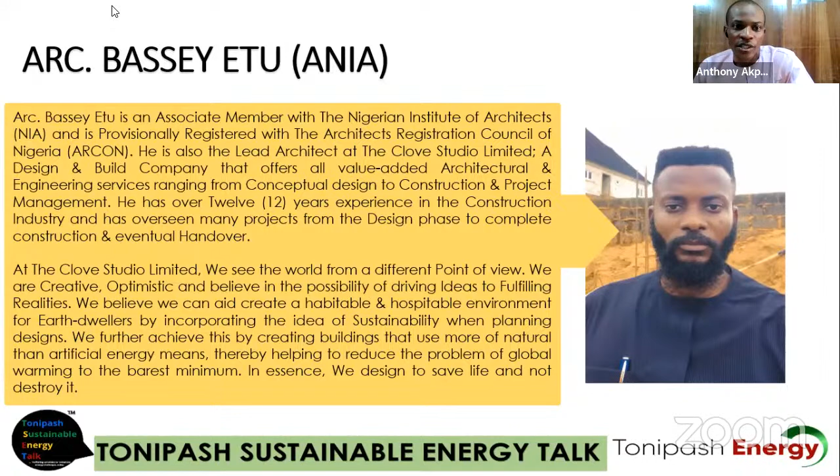So we will go straight to our first presenter, who is right now on the call, Dr. MKO Balogun. He's the founder of the African Facilities Management Institute and the GMD/CEO of Global Properties and Facilities. He was a co-founder of Dome FM Limited, which later merged with WSP FMC Nigeria in 2012, for which he became the MD. MKO has grown his company from a local Nigerian company to a Pan-African group, registered and operating in 10 African countries. He had his Bachelor in Mechanical Engineering from the Federal University of Technology, Owerri.

He has an MBA from Lagos Business School of Pan-Atlantic University and a PhD in Management from Commonwealth University, Belize. His area of focus in recent time is sustainable urban design and development and facility management. He was recently elected to the prestigious fellowship cadre of the Nigerian Society of Engineers. He's also a professional member of the Green Building Council of Nigeria and the national chairman, Nigerian Institute of Facility Engineering and Management.

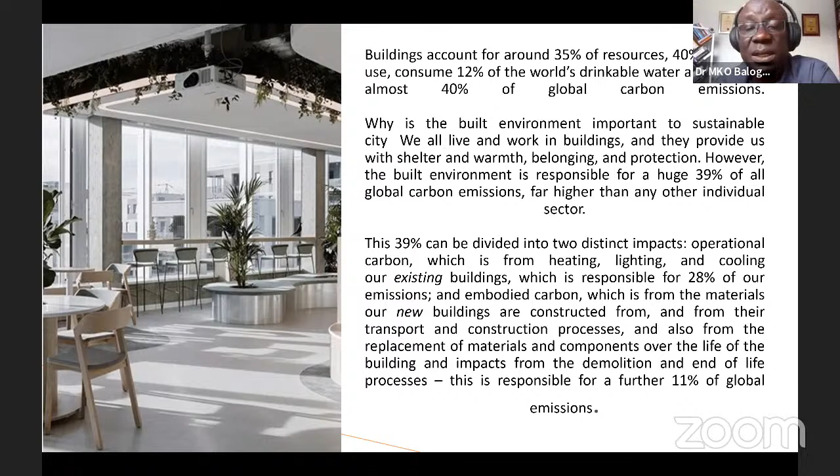Operational carbon, which is from heating, lighting, and cooling existing buildings, is responsible for 28% of our emissions. Embodied carbon, I'm sure some of our panelists are going to talk about the embodied carbon of materials in buildings, accounts for 11% of global emissions. So this is very important, the need for us to pay attention to building and the real estate sector.

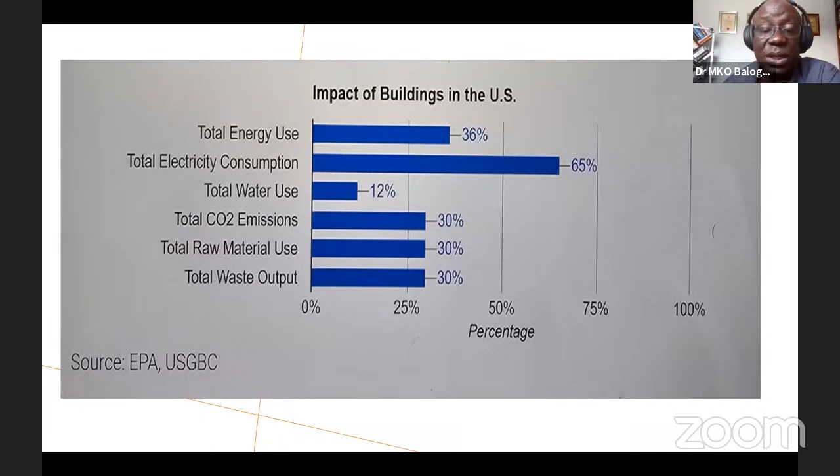This is the data from the US provided by USGBC. Energy use is 36%, total electricity consumption is 65%, total water use is 12%, CO2 emissions 30%, total raw material use is 30%, total waste output is 30%. So you can see the impact of buildings in the US. We don't have data for Nigeria and Africa yet. I'm sure any of our panelists may have that information to share with us, but this shows the need, and thanks to the organizers of this session for us to talk on it.

We cannot talk about sustainable buildings without the cities, because they exist in cities. All the things that come into building design, development, and management come from cities. The level of awareness, materials, and development in a city matters even for organizations interested in building sustainable buildings; they may find it difficult if the city where they operate doesn't provide that opportunity. So sustainable design is a method of wisely using resources to create high quality, healthier, and more energy efficient homes and commercial buildings. A building is more than the sum of its parts; its process and impacts matter too.

The main objectives of sustainable buildings are to reduce or completely avoid depletion of critical resources like energy, water, land, and raw materials; prevent environmental degradation caused by facilities and infrastructure throughout their life cycle; and create built environments that are livable, comfortable, safe, and productive. This is very important, and everything we're talking about here emanates from the environment, from where the buildings are situated.

According to the whole building design guide, there are 6 key fundamental principles for sustainable building design that need to be focused on. The first is to optimize site potential. In everything we're doing, you find that building orientation is very critical.

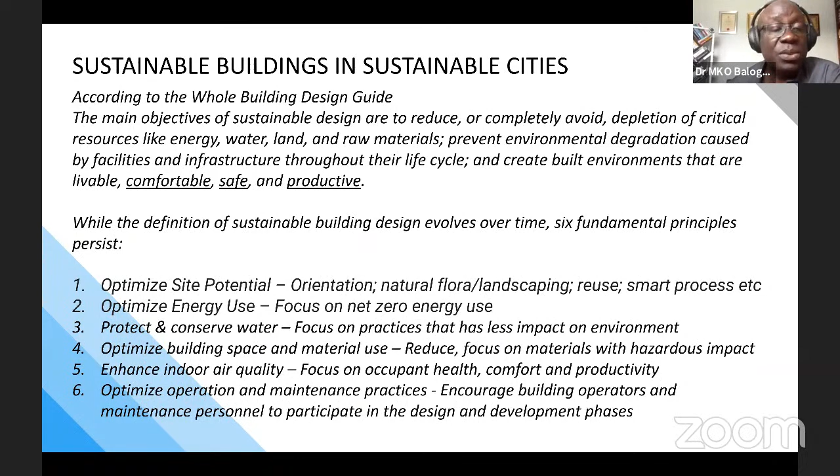As I mentioned, there's this need to connect cities and the buildings. I'll just take you through a couple of concepts on sustainable cities. Sustainable cities, also referred to as eco-cities, work towards creating environmentally, economically, and socially resilient surroundings for their citizens without compromising the needs of future generations to thrive in the same environment. According to the Sustainable Cities Index, a sustainable city can be evaluated on 3 parameters: profit, people, and planet. The profit factor measures the value of real estate and the ease of starting and running businesses. The people index focuses on the living standard of the people, literacy, education, and health.

We talked about indoor air quality as part of the consideration. Profit is part of design. Today actually in the industry, there are companies who are looking for sustainable buildings to buy, to lease, or to invest in. So it's become a major driver of profitability for investment.

Planet: our social responsibility to ensure we don't deplete the environment or impact negatively on the environment is also very critical. Transportation, water, sanitation, air pollution, and carbon emission, among other factors, are critical components and elements that drive sustainable cities, which, as I said, link to the buildings. Cities do not exist without buildings, and buildings do not exist without cities.

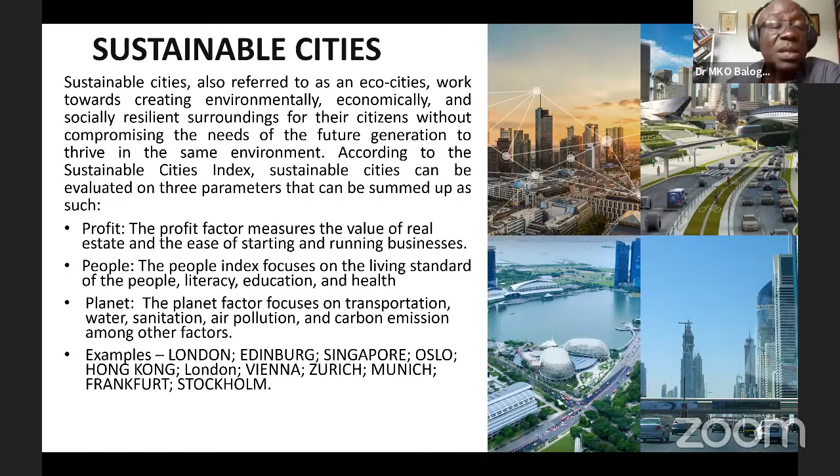There are a couple of cities in the world today that are focused heavily on sustainability and also enhancing sustainable building design. You have London, Edinburgh, Singapore, Oslo, Hong Kong, Vienna, Zurich, Munich, Frankfurt, and Stockholm. They're all focused on sustainable development, and you find that most of the buildings today that are focused on sustainable development exist in those cities.

These are just resource utilization. You see waste generation has been mentioned. Waste generation is growing. Buildings contribute a lot, as you can see from the previous slides. It is believed that we're going to be generating 2.2 billion tons in 2025 globally. Carbon emission is driving towards 70%. Buildings contribute more than 39% of that globally.

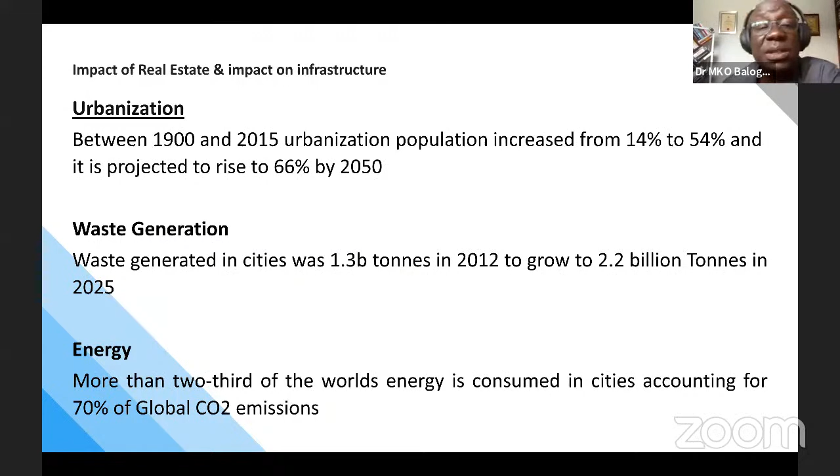So, what are the industry players thinking or saying about the impact of buildings on the environment, and what actions are they taking? Now this is very important, and this also becomes positive for those of us in the industry, because we have people in our space who are interested, not just at the industry level, but also at the global level.

It's already a group being set up by the World Economic Forum to drive the framework of sustainability in the real estate sector. The idea is to ensure that people who are in the industry, who are investing or managing or operating buildings, start focusing on how to achieve net zero and reduce impact on the building. Recently, 8 companies signed a declaration to reduce emissions by 50% by 2030. Those companies include our company, GPFI, as one of the companies driving this globally.

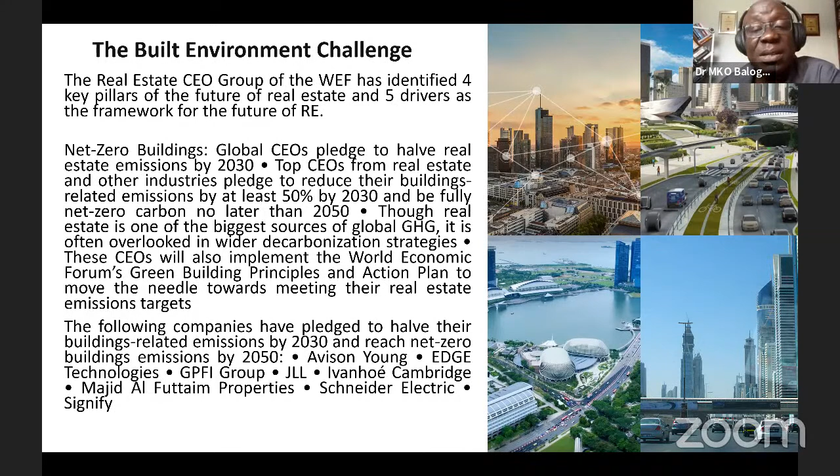And basically, it's driven from ESG. Today, companies are focused on environmental, social, and governance, and so sustainability has become a component of that. I mentioned employee expectations, societal demand, the business goal of environmentally friendly, economic green building. Occupiers will pay more for green buildings than normal buildings. The global need to reduce emissions is the major driver of increased focus on sustainability by the real estate sector. Greening existing buildings has also become very important, and most companies today are focused on ensuring that happens.

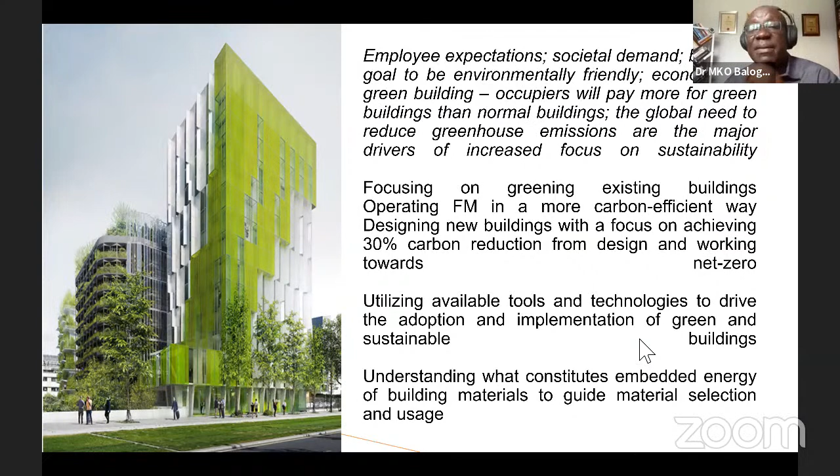Every major organization is moving towards rethinking and remodeling their assets. Fortune 50 companies alone occupy 2.6 billion square feet of real estate, and some of it is mostly empty because of the pandemic, but everybody's redesigning. And the purpose is that more buildings will be taken if they are green buildings than if they are just ordinary buildings.

There are five topics that the real estate industry is focusing on and advancing. The net zero agenda is critical. Navigating the reporting and measurements landscape to ensure that we're not just focused on net zero, but we're reporting progress at every stage and every year, so that people can see we're making progress. Confronting climate risk, which is very important in design, development, management, operations and maintenance of our buildings. Prioritizing existing buildings, finding ways to remodel them to make them more sustainable.

Focusing on building materials, which is a major component of achieving sustainability. I said some of our panelists are going to expand more on that. These are: reduce embodied carbon, increase energy efficiency, increase renewable energy supply on site, maximize off-site renewable energy procurement, offset remaining carbon. So these are things that are today being driven by the people in real estate, which, as I said, is good news that we're focusing on achieving this.

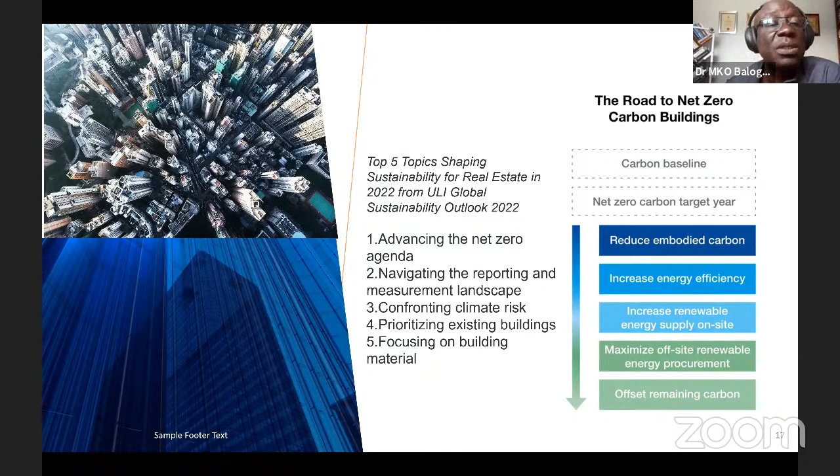So what are the things being done? Understanding your current sustainability adoption level. Where are you today? What have you done? What do you need to do? Develop capacity, understanding the opportunities for greening and transforming your spaces. Working with experts, understanding what can be done, what the options and opportunities are for greening existing buildings and transforming your spaces. Creating a carbon emission target and driving towards achieving it. I've mentioned global companies are focusing on setting targets and driving towards achieving them, looking at various options to do that.

Creating business-wide interest and adoption. This is very important because in most organizations, the top management may be focused on sustainability and green building, while members of the organization are not aware of what's going on. So this is part of the drive to do it, company-wide adoption, and the same thing countrywide, citywide, to ensure that we start driving adoption and interest in sustainability.

Collaborate with others in your building and community for the adoption of these methods. Very important. Working with individuals, working with organizations, working with private interests, we ensure that this is achieved. Promote your sustainable practices in the community. Advocating and showing what you're doing is part of creating awareness. When people know that others are doing it, it helps them to say, yeah, it's possible, and we can also do it.

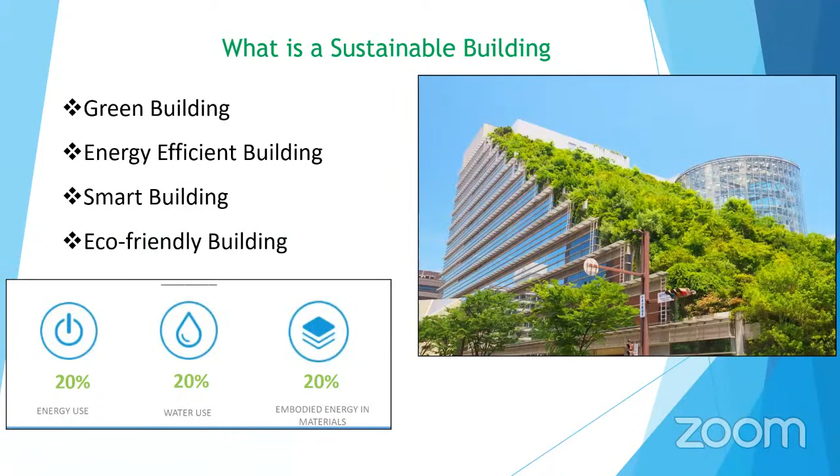Now, why the concept of green building? Why is it relevant? Why is it out there? If we look at the 17 SDG goals by the UN, about 9 of them are supported by green building. If we look at good health and well-being, sustainable building or green building can promote good health and well-being. Research has shown that people living in sustainable buildings live a healthier life than those living in conventional buildings. Green building also supports goal number 8, which is decent work and economic growth. When you are healthy, your productivity will also increase.

That's SDG Goal 8. If we look at SDG Goal 11, sustainable cities, green building also promotes sustainable cities and communities. That is why in Germany they have what they call the green urban city, where you don't only certify a green building, you can also certify a community or a big estate. Let's say Banana Island or an urban city, you can also certify them as sustainable. Most importantly, when we look at Goal 13, which is climate action, green building has helped to reduce the effect of greenhouse gas emissions, which is causing a lot of problems in Africa. We'll talk more about that later.

Also, when we look at Goal 17, which is global partnership, that is what sustainable building is currently doing. There are a lot of green building certification bodies creating partnerships worldwide, and IFC is driving that partnership seriously in Africa. When we look at goal 7, which is affordable and renewable energy, for a building to even achieve net zero carbon, that building must have used renewable energy in the form of solar. So green building also helps to promote innovation and create resilience to climate change in our environment.

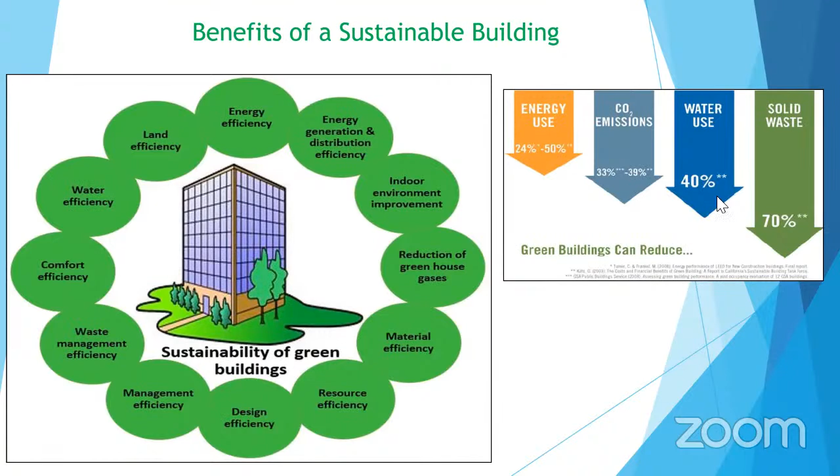Now, sustainable building design in Africa. Why Africa? Why are we so particular about Africa? Because that is the title of the presentation, Sustainable Building Design in Africa. Why are we so particular about Africa? One, because of poverty. Poverty can create an environment that is not sustainable. Poverty is rampant in Africa. Two, there is a high population increase. Despite the poverty level, the population is increasing exponentially.

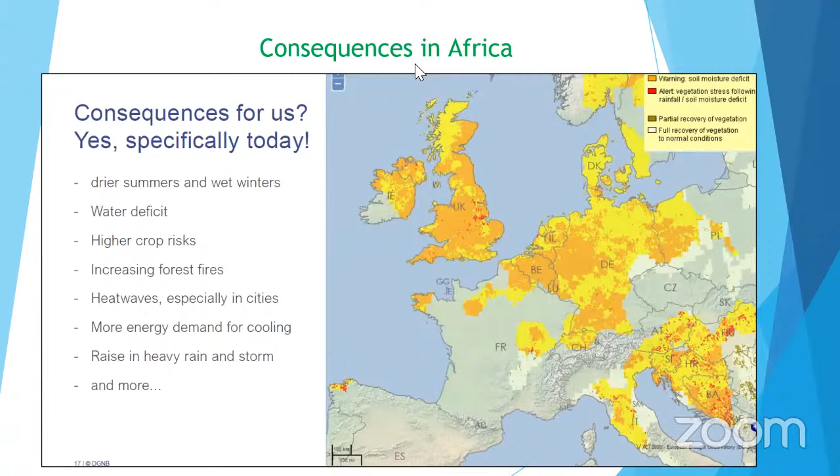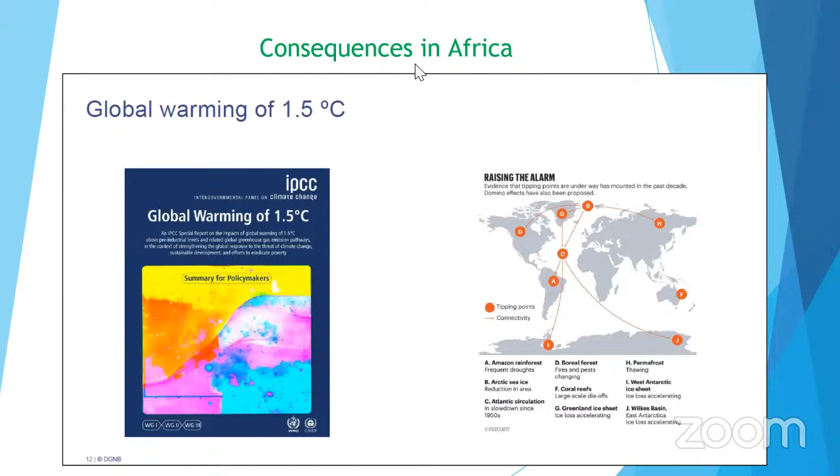What can we do? We should try to advocate for green architecture. Green architecture is a way of designing our building to meet the green building standard. It doesn't mean you must certify the building to the green building standard by maybe the international IFC using EDGE, or using LEED, or using BREEAM, or using DGNB.

But you can design your building and the professional can help you to assess it. And they can also verify and certify that, yes, when you construct this building it will definitely meet up with green building standards. And I thank the Lagos State government that is taking that bold step.

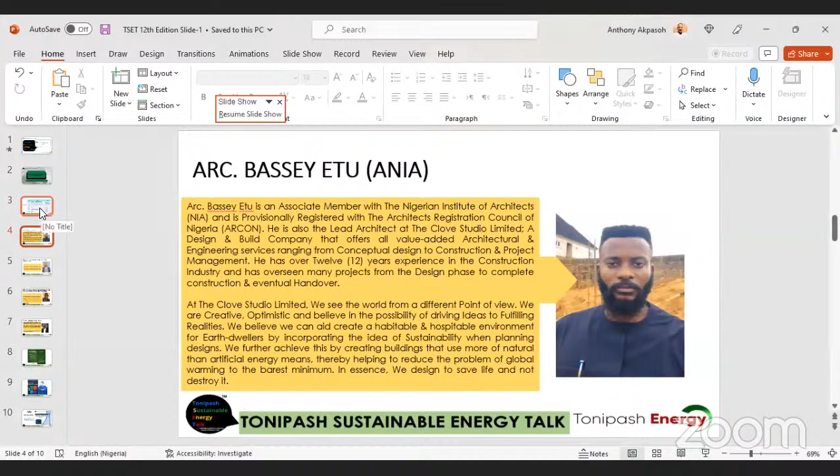Although I did not join in from the beginning, that was a very wonderful speech by Engineer Dr. Sunday Biki concerning the theme, sustainable building designs in Africa. I actually learned a lot from that, especially the suggestion of green architecture, the use of green architecture for designs to combat the problem of sustainability in designs in Africa.

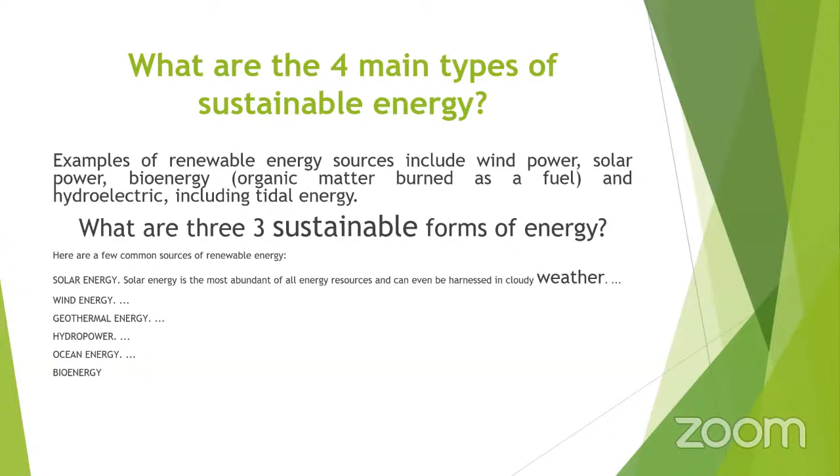What are the three primary aims of energy strategy? The energy strategy has three key elements: to support economic growth and job creation, to enhance energy security, and to develop and deploy low carbon technologies, laying the foundation for a clean energy future.